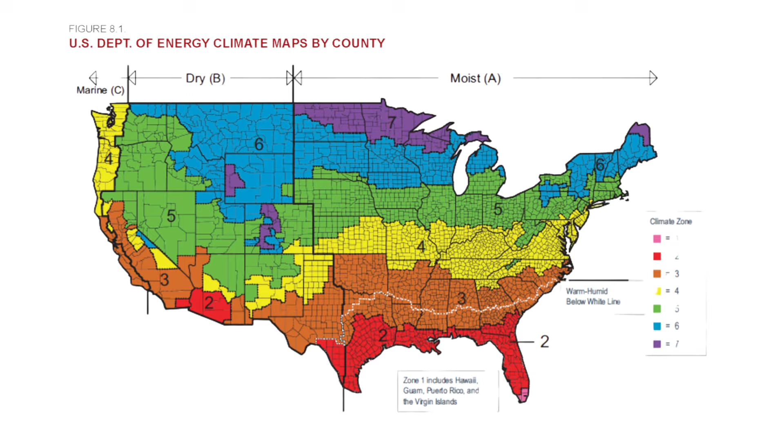The first one, subsection 8.1, is really talking about climate zones. As a builder, you need to know what climate zone you're in because the code is very specific about how we treat climate zones, or more importantly, details within various climate zones. We certainly do things differently in Maine than we do down here in West Virginia, or down in Phoenix, because the climate is completely different. So it's incredibly important to know what climate zone you are in and follow the details and requirements of that specific zone.

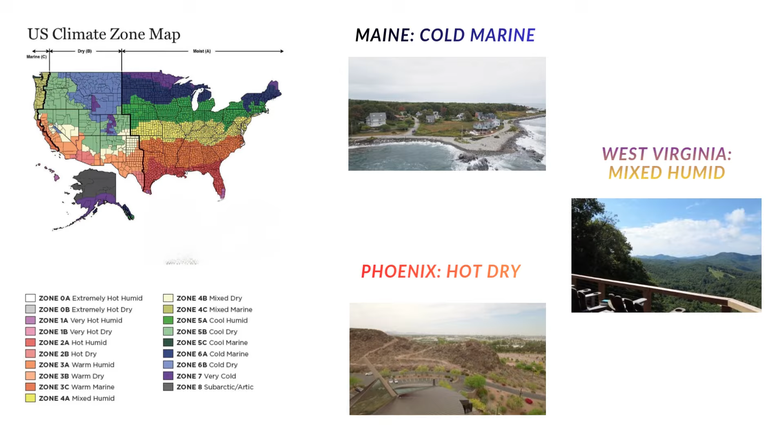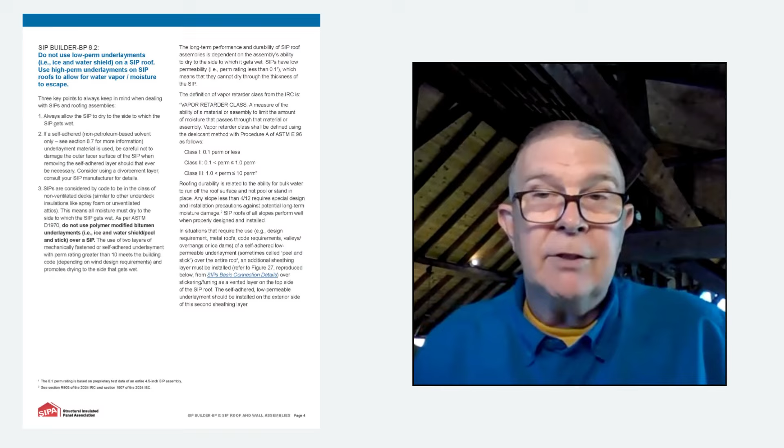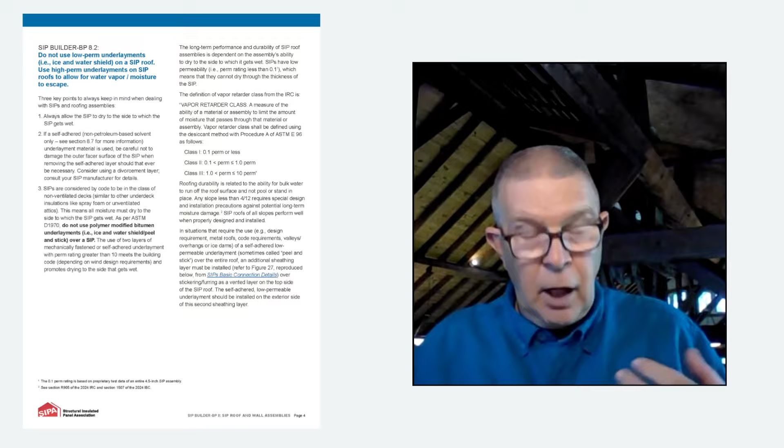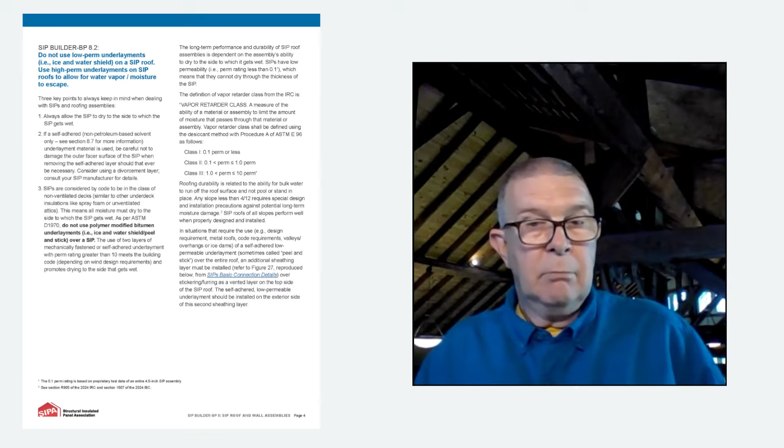8.2 is essentially: do not use low-perm underlayments, ice and water shield, on SIP roofs, except in valleys. Kudos to that, because this is one of the areas where I see more durability problems with SIPs when somebody doesn't follow the guidelines prescribed by the code and by SIPA, which says we do not want to put a low-perm underlayment on top of a roof assembly. The reason is because we're trapping moisture underneath that low-perm area. We want a SIP to be able to dry in order to remain durable first and foremost. But the way we do that is to look at the permeability of the claddings or underlayments that are going to go over top of that roof panel.

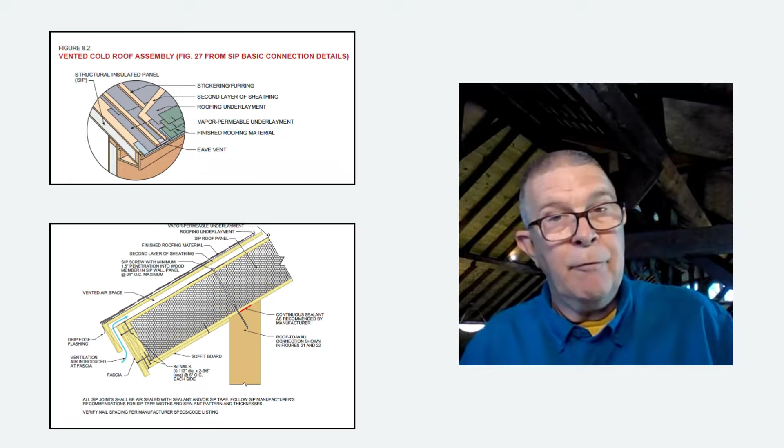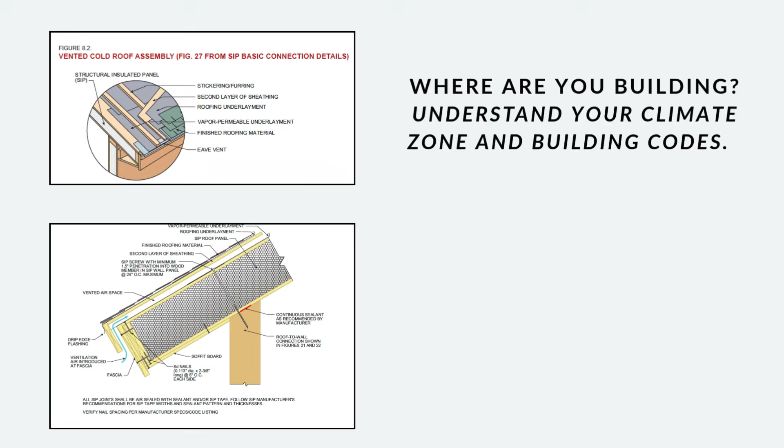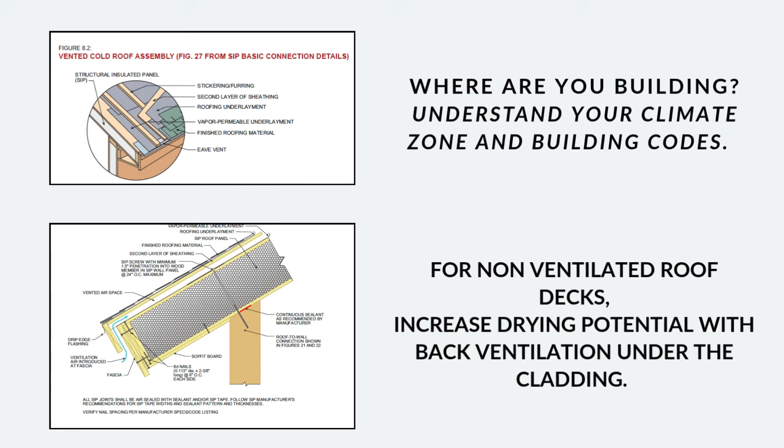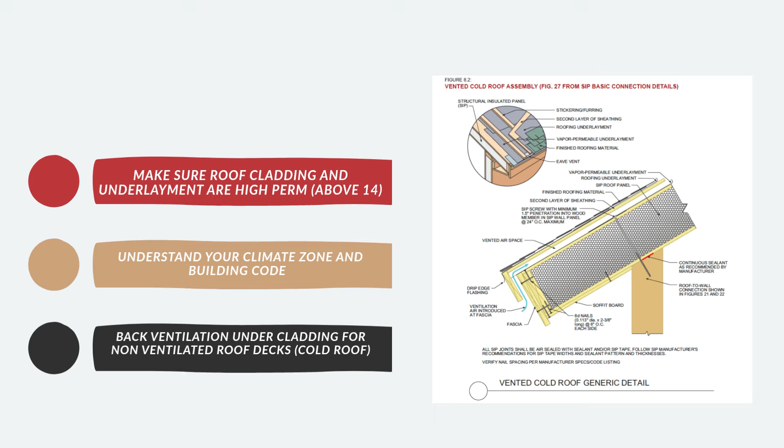So it's very important to understand: where am I building? What does the code require in that particular location? And if we're putting up a non-ventilated roof deck, do we need to increase its drying potential by making sure that we have ventilation underneath that cladding? Some people might call that a cold roof -- we're ventilating between the roof insulation and another layer of roofing. Whereas on the walls, we might call it a rain screen. That is what we're trying to do to keep our buildings durable and prevent moisture problems long-term.

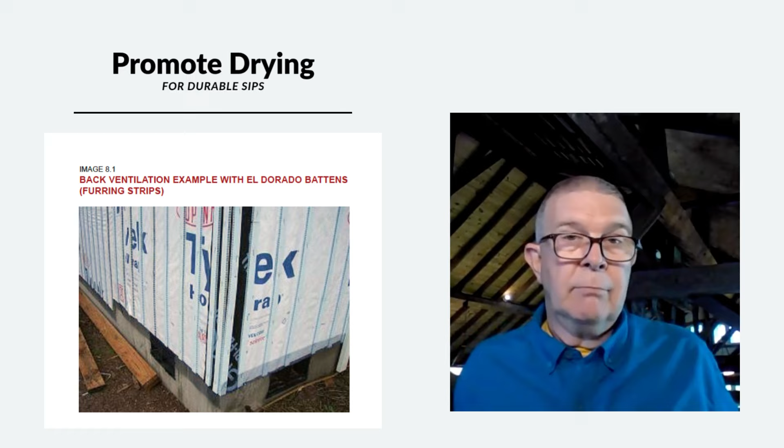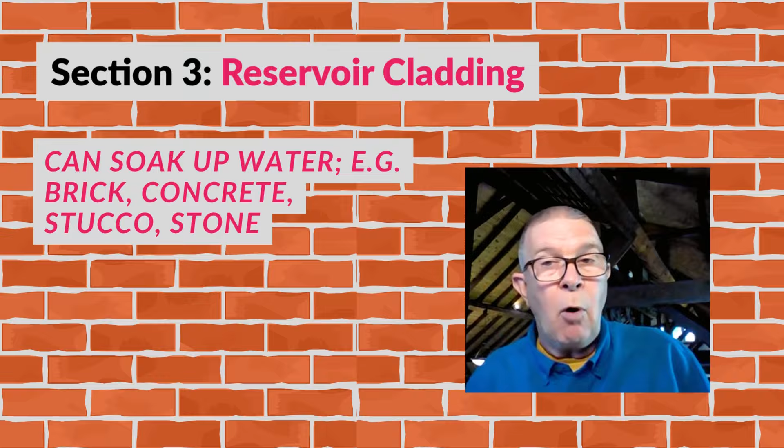Our third subsection is time to talk about reservoir cladding. This is important because a lot of designers and contractors like to use brick, stone, and concrete sheathing and other materials, which are known in the building science world as reservoir cladding. That means they can soak up water. If the house gets rained on, it's going to soak up moisture and hold onto it -- hence the term reservoir. Then when the sun comes out, a strange thing happens in physics where it drives with pressure the vapor that it creates within that reservoir cladding into our structure. That can be dangerous, because we don't want moisture inside of our assemblies -- we want to allow them to dry out.

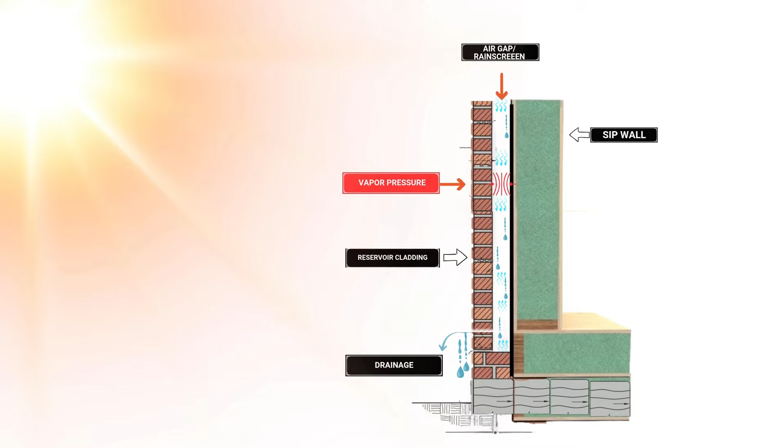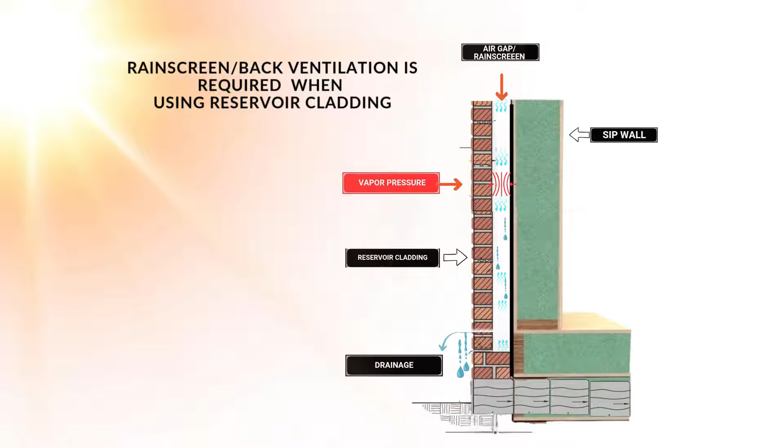So those reservoir claddings are particularly important to have back ventilation. In the code, it's absolutely required behind brick and stone that you have an air space so that air can move and help dry them out. This is also true if you choose a cementitious siding, because that material will get wet, absorb moisture, and potentially you'll get vapor drive, which pushes that moisture into your assembly where we don't want it. So if you're going to use reservoir claddings, make sure we use back ventilation -- that's true almost everywhere. I don't care if you're in Phoenix with huge drying potential: a big rainstorm that gets the stone or brick wet is going to push that vapor into your building. So we want back ventilation behind all reservoir claddings.

Fastening claddings to the wall or roof assembly, I'd say in most cases this is an issue when dealing with metal roofing. A lot of metal roofing wants to attach to a rafter, truss, or embedded lumber where they know the pullout or holding value for proper fastening of their cladding onto the structure. If the structure is made of SIPs, and SIPs inherently don't have nearly as much lumber, as we talked about with framing factor earlier in this series, the framing factor is low, so there's not a lot of lumber to attach to.

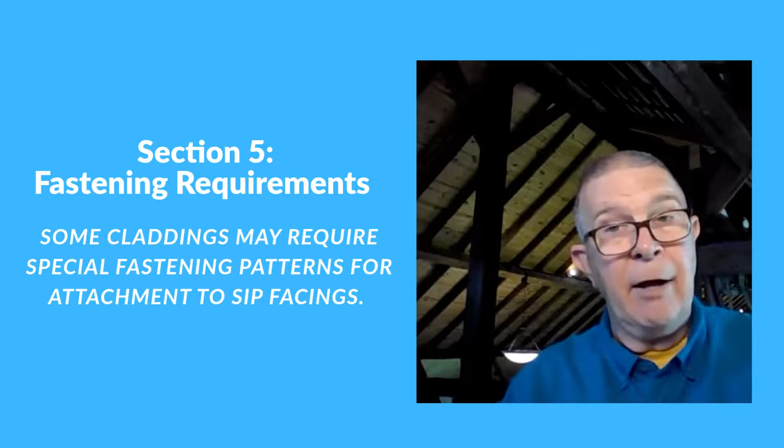We have 7/16 OSB, or maybe something thicker depending on the type of SIP you're using. Therefore it's incumbent upon the cladding manufacturer to define how their material gets attached and held to the structural insulated panel.

Go back to the cladding manufacturer and say, I'm applying your product to a SIP, which is 7/16 OSB. I need you to specify the fastening schedule to hold your material to 7/16 OSB. And if you don't want to give it to me, then I'll go use your competition.

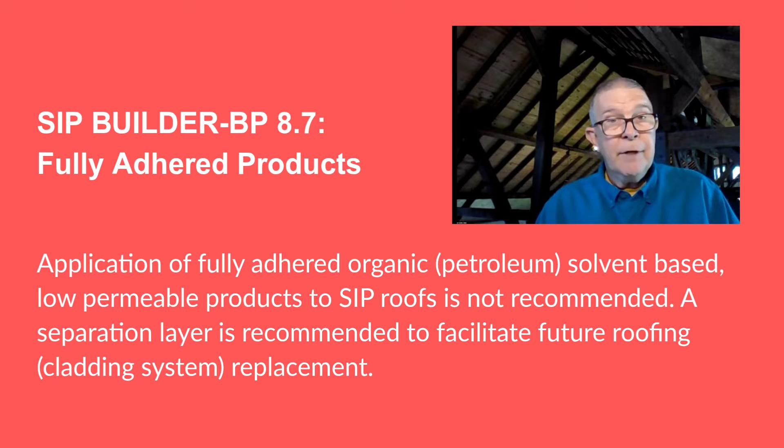In this subsection, we want to talk about fully adhered products over top of SIP roofs, often done in commercial structures where a TPO or rubber membrane, or some type of flat roof, gets a fully adhered roof membrane over top of it. The concern we have as an industry - and I'll be honest, it's a concern we should all have in any high performance home, regardless of what it's made from - is that we're not allowing air to move through it. We have a lower capacity to dry.

And if we put a membrane on the outside, where the vapor barrier doesn't necessarily go - it wants to go on the inside per code - we've now potentially got a barrier on both the bottom of the roof deck and the top of the roof deck, and moisture gets in there. It can't go in either direction to dry out.

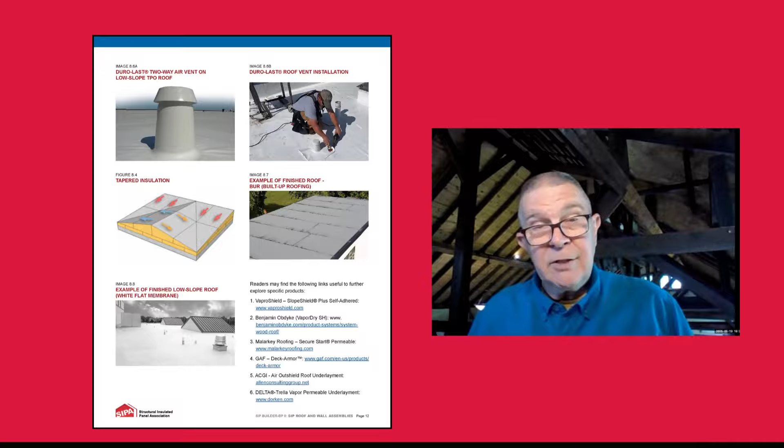This is to say, we can still use this type of membrane system. We just need to incorporate a means for airflow underneath it and a means for that air to escape and get out. It's easily done. You just have to know it's important that it gets done, and verify that air is moving to allow that moisture to escape. Otherwise, you're going to have accumulated moisture and potentially durability issues.

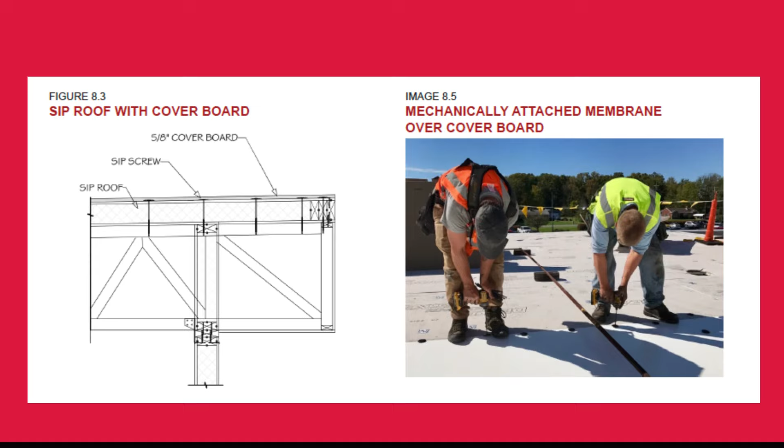SIP Builder BP 8.8, SIP tape. You might say, well, where does that SIP tape go? The code is very clear on this. SIP tape acts as a vapor barrier, and the code says the vapor barrier must go on the warm side.

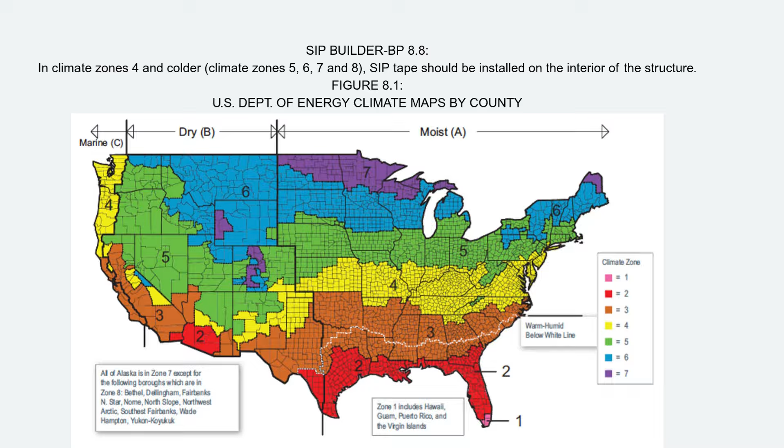Well, where's the warm side? If you live in the north, it's pretty obvious - it's on the inside of your structure. If you're down in climate zone 1, the warm side is on the outside of your structure. If you're building this in Miami, the SIP tape goes on the outside. But if you're up in Maine, where you are, Mary, it's going to go on the inside.

The vast majority of the country, however, is in climate zone 4. We get hot and cold seasons. So where do we put it - on the inside or the outside? We put it on the inside because the differential temperature in the winter, between interior space and outside, is much, much greater than it is in the summertime.

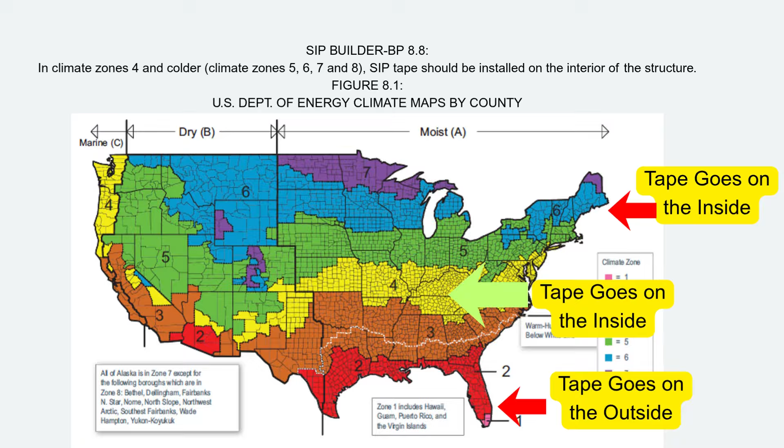The SIP tape, as a belt and suspenders sealing methodology, goes to the inside of your structure. That's going to prevent air movement through the joint if the sealant on the inside is somehow still allowing air to move through, and that's what gives us the air tightness that we need. Once we put that tape on, we have a continuous air barrier that also acts as a vapor barrier, because SIP tape was designed that way. That's very important for your overall sealing methodology in making this building airtight and high performing.

Moving on, let's talk about solar panels. If you're going to build an energy efficient SIP house, why wouldn't you put solar panels on top of it? The good news is you can. It just means we need to think about how a solar array gets attached to the roof SIPs. It's important to understand that lumber embedded in the roof panels is an integral part of a SIP system that allows you to attach a solar array, simply by knowing where those lumber elements are, so that when the solar installer comes to attach the panels, they can lag, bolt, or screw into that dimensional lumber, giving your solar array the hold power it needs so it doesn't blow away in the wind.

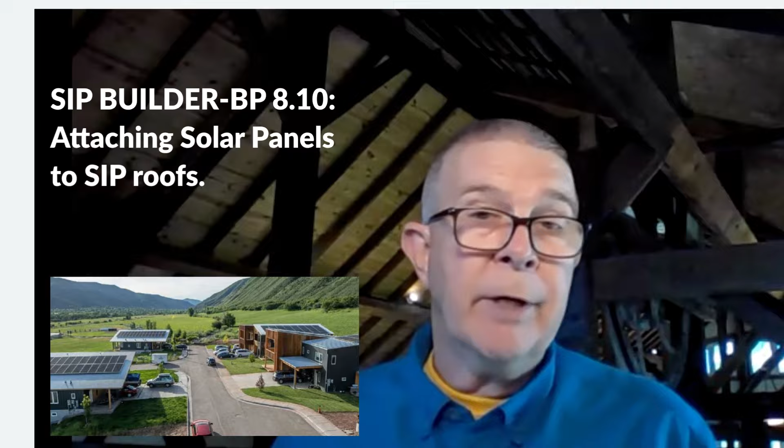Last, certainly not least, let's talk about ridge vents. Do we need them? Why? The answer is yes, we do need a ridge vent in most cases, especially if we've put in back ventilation behind our cladding, as we stated earlier. That back ventilation is an airspace, and there's air moving under that cladding. Where's that air going to go if it doesn't have a ridge vent?

Let's not confuse the ridge vent with traditional frame construction, where that ridge vent is actually getting air out of an unconditioned attic. We don't have an unconditioned attic — we have conditioned space because we built with SIPs. That's a good thing. We're certainly not going to cut through the SIP and ventilate underneath it — that isn't going to happen, although I have seen a builder try to do that. What we want to do is put the ridge vent in, whether metal or asphalt shingle or anything else, so that the air moving up that roof plane underneath the cladding, carrying moisture and helping to dry and keep things cool, has a way to get out of the roof. So ridge vents are something we very often see in SIP roof assemblies.

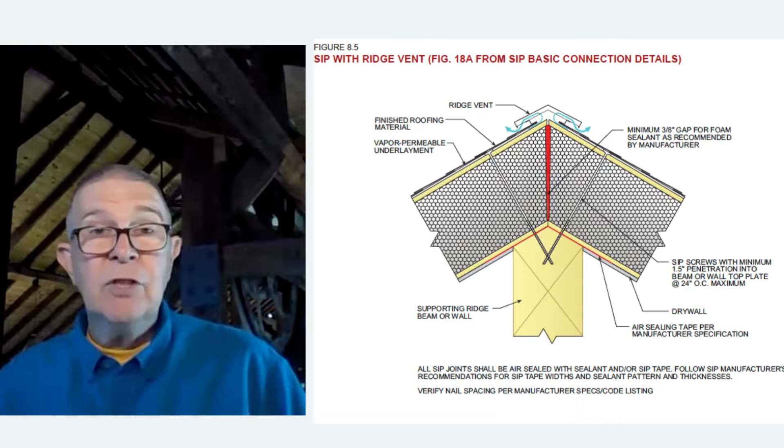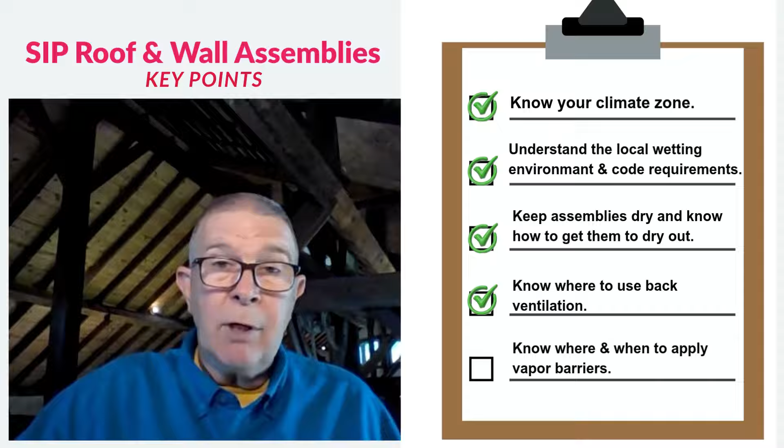First and foremost, hopefully we know where we're building and what the code requirements are for that particular geographic location, and what the wetting environment is there. You have to understand that and how you're going to meet that local environmental aspect. It all comes down to keeping things as dry as you can, but more importantly, knowing how to get them to dry out. Understand where and when you need back ventilation. And all of that falls right into the code requirement of vapor barriers, and where that vapor barrier gets applied, so that we know we're allowing this assembly, whether wall or roof, the proper ability to dry and stay durable.